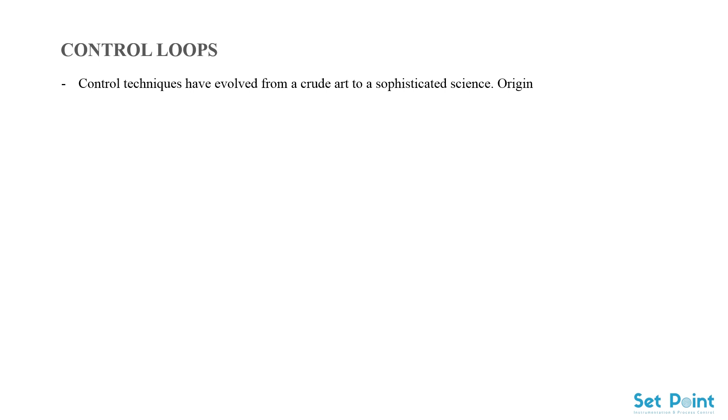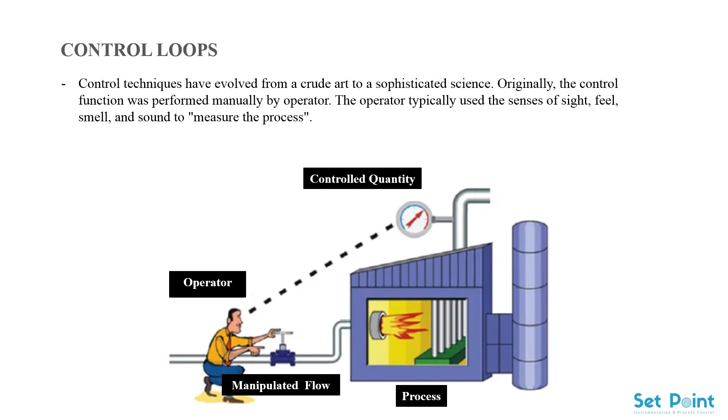Control loops. Control techniques have evolved from a crude art to a sophisticated science. Originally, the control function was performed manually by an operator. The operator typically used the senses of sight, feel, smell, and sound to measure the process. The operator would adjust a device, such as a manual valve, or change a feed, such as adding a shovelful of coal, to maintain the process within set limits.

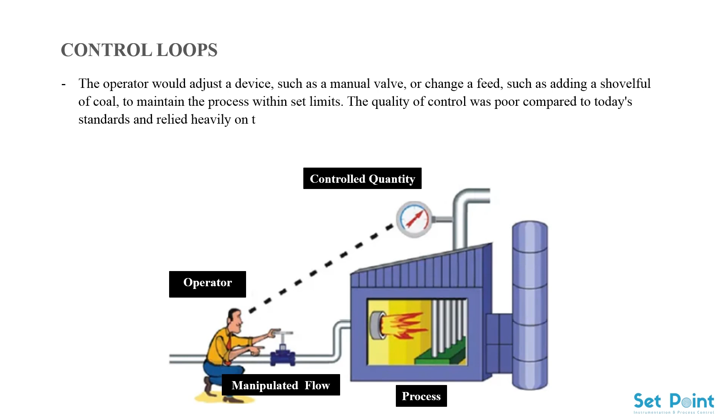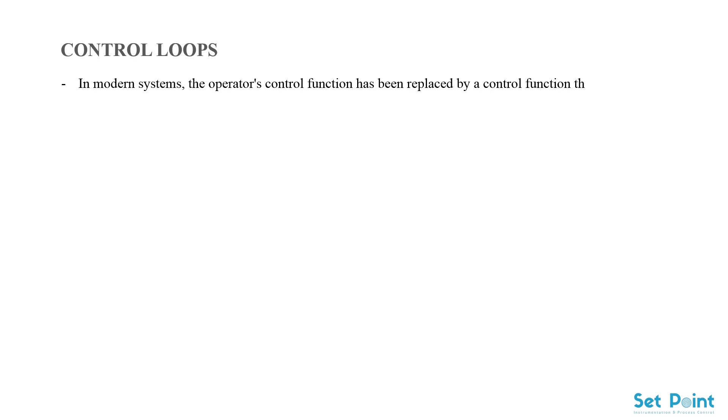The quality of control was poor compared to today's standards and relied heavily on the capabilities, response, and experience of the operator. In modern systems, the operator's control function has been replaced by a control function that continuously compares a measured variable, the feedback, with a set point and automatically produces an output to maintain the process within limits.

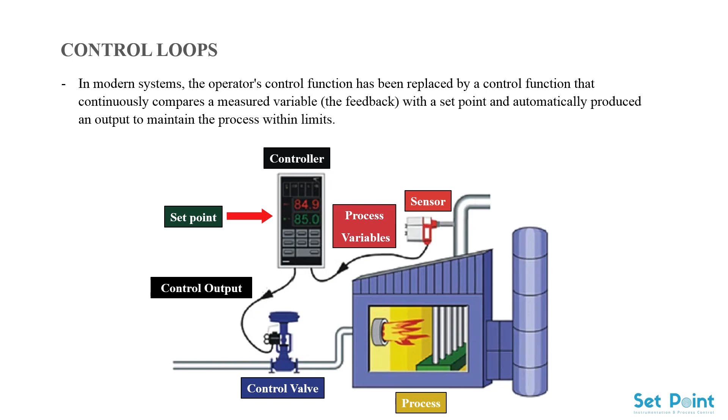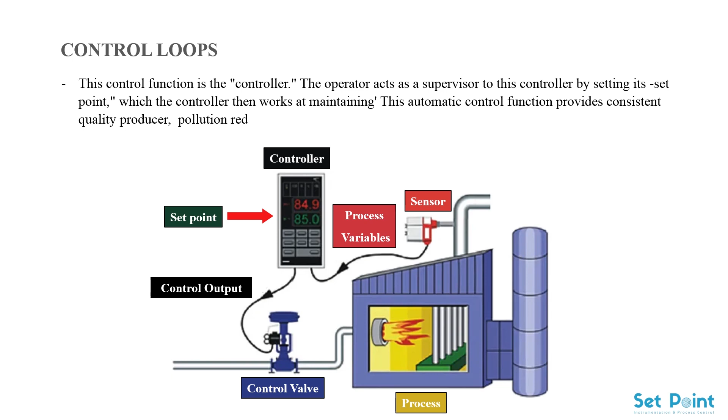This control function is the controller. The operator acts as a supervisor to this controller by setting its set point, which the controller then works at maintaining. This automatic control function provides consistent quality, pollution reduction, labor savings, optimized inventory and production, quality products, increased safety, and control of processes that could not be operated manually.

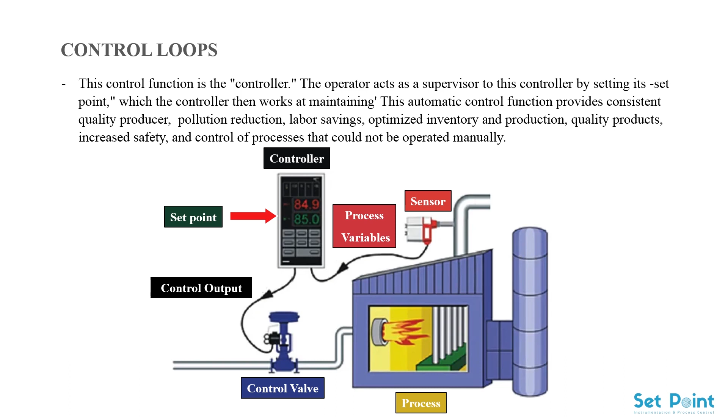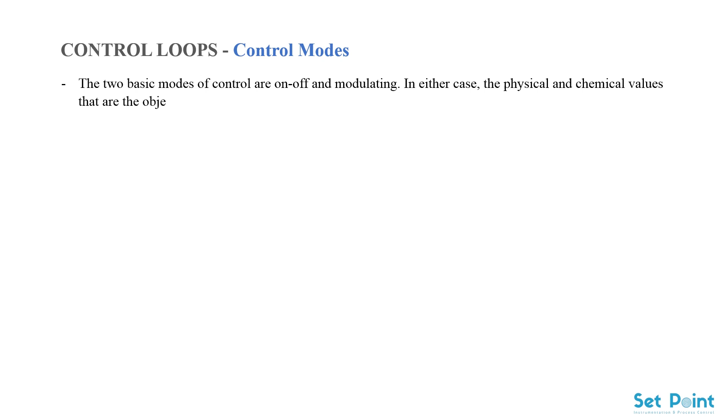Control modes. The two basic modes of control are on-off and modulating. In either case, the physical and chemical values that are the object of measurement are generally referred to as variables.

On-off control. On-off control is also known as discrete control or two-position control. In it, the output of the controller changes from one fixed condition to another fixed condition. Control adjustments are made to the set point and the differential gap. The differential gap has basically two set points, or one set point with a differential gap or deadband.

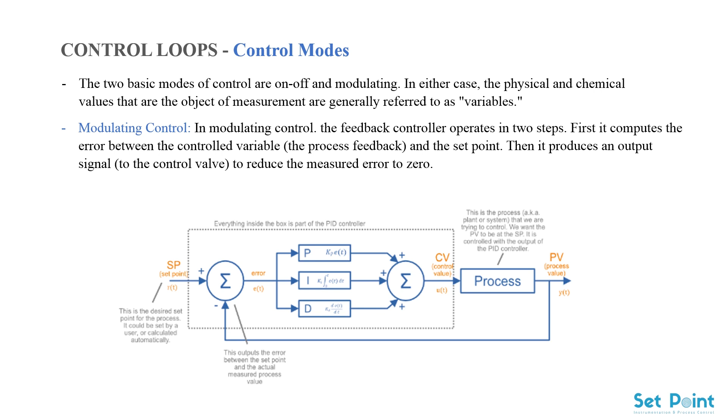Modulating control. In modulating control, the feedback controller operates in two steps. First, it computes the error between the controlled variable, the process feedback, and the set point. Then it produces an output signal to the control valve to reduce the measured error to zero.

Control loop types. Four main types of control are commonly used: feedback, cascade, ratio, and feed-forward.

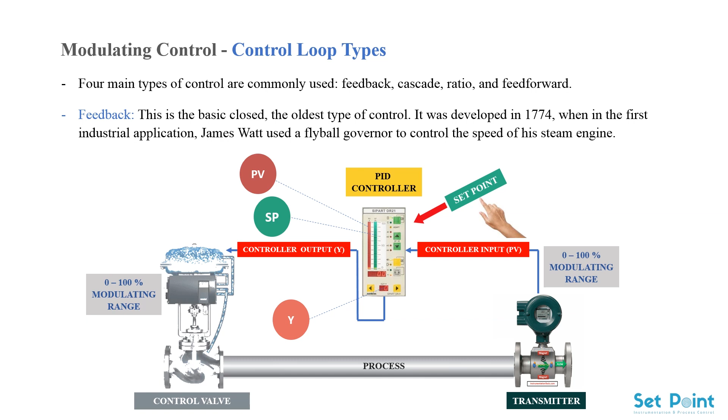Feedback. This is the basic closed, the oldest type of control. It was developed in 1774, when in the first industrial application, James Watt used a flyball governor to control the speed of his steam engine. An open loop has no feedback and cannot be considered a closed loop. Remember that the operator, monitoring the controlled variable and adjusting the output to the valve, acts as a controller, thereby closing the loop. However, this is not an automatic function, and it totally depends on the operator's manual output as an input to the loop.

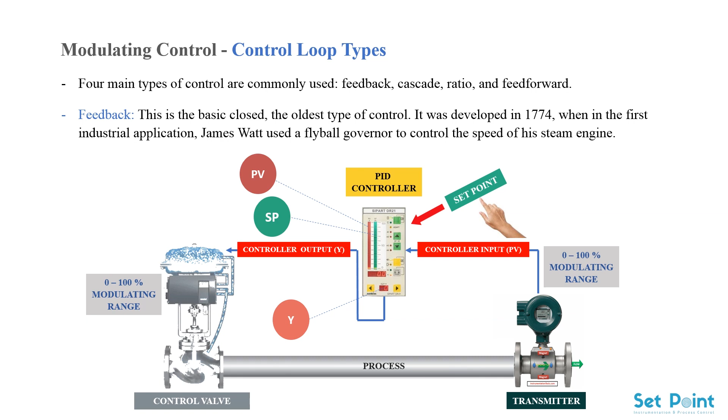Cascade. In cascade control, the primary variable is controlled by the primary controller, sometimes known as the master. However, it is not a direct control. Instead, it manipulates the set point of the secondary controller, which controls the secondary variable.

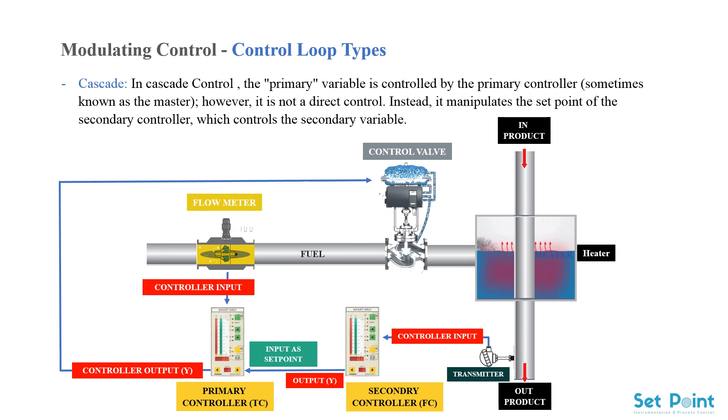Ratio. In ratio control, the controlled variable follows in proportion to a second variable known as the wild variable. The proportionality constant is the ratio. Ratio systems are not limited to two components. One wild flow can adjust several controlled flows.

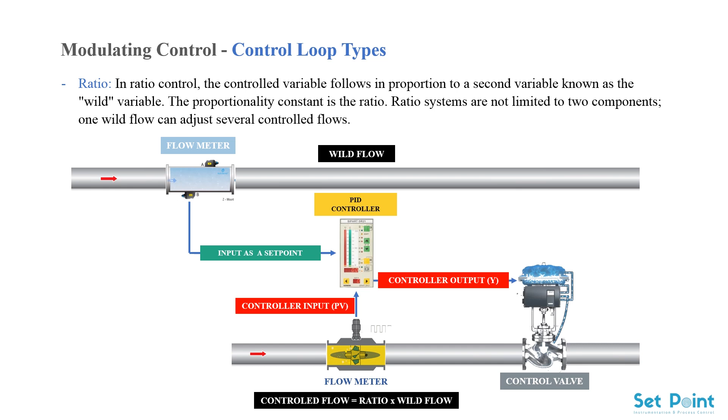Feed-forward. A feed-forward control system measures a disturbance, predicts its effect on the process, and immediately applies corrective action. Feed-forward control is by itself insufficient. It is generally used in conjunction with feedback control to trim the feed-forward model. It should be noted that feed-forward is an open loop. Feed-forward and feedback systems independently adjust the control valve. There is no control applied to the feed-forward variable.

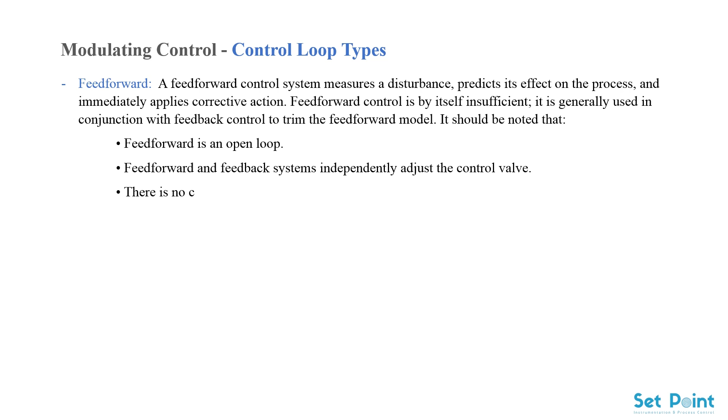Any change in the flow rate of ingredients A, B, and/or C is quickly matched by an equal adjustment to the discharge flow rate. So long as total volumetric flow out of the vessel is held equal to total volumetric flow into the vessel, the liquid level inside the vessel cannot change.